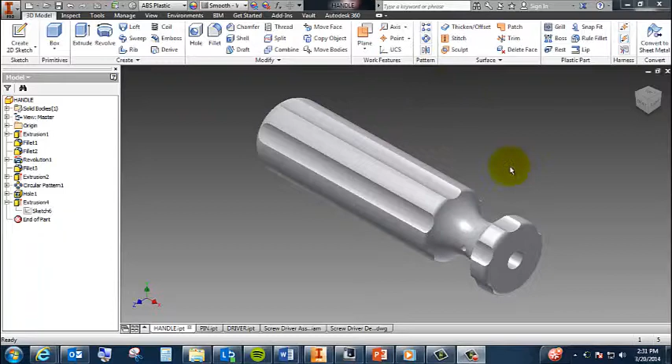This is where the project begins with the actual modeling of the different parts of the screwdriver. I first started with the handle, like you can see.

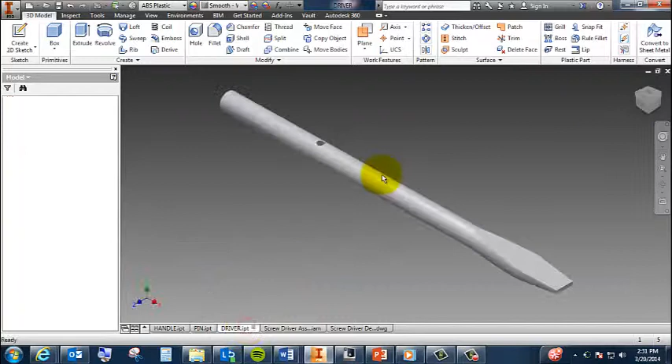You can change the material, you can do whatever you like to this model. Then I did the pin, which ends up holding the handle to the driver. And then the third and final part is the actual driver, and that would be this piece.

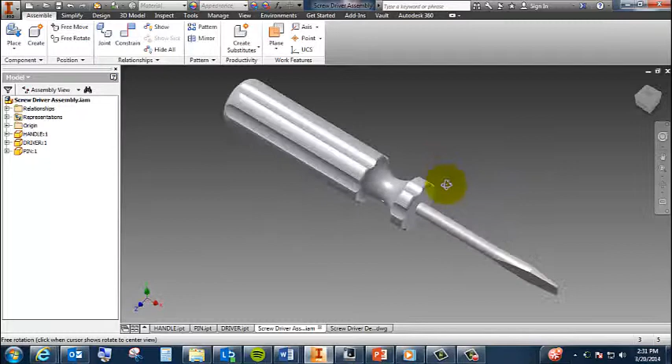This was all done by 3D modeling in Inventor. Then from there, you go ahead in the same program and assemble all three of your objects together. You'll notice the handle and the driver are together, as well as the pin holding it.

And then lastly, you go ahead and create your detail drawings of each part with the dimensions, as well as the assembled version, calling out the different parts with your different balloons, and a parts list with all the information from material, mass to volume, part number and name.

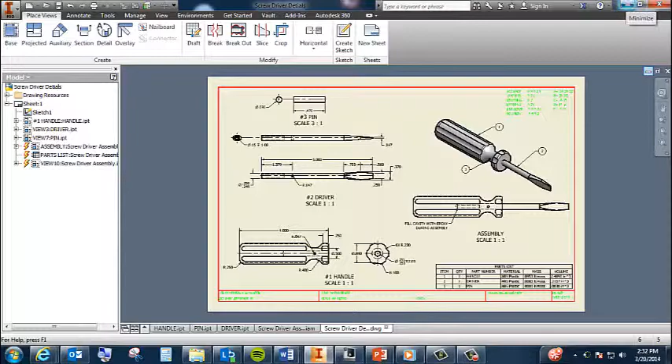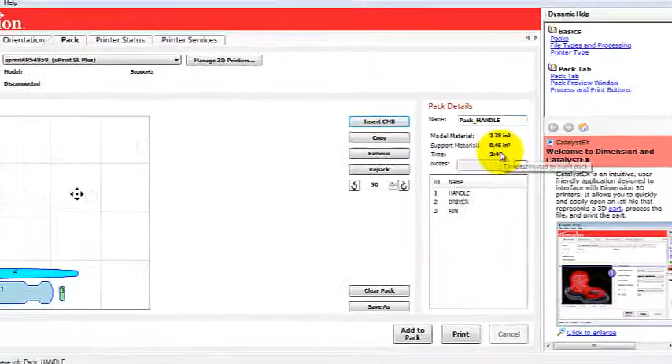It's actually very cool because it can tell you how much time it's going to take, how much material you're going to use as well. So it's a really cool program to go ahead and produce your drawings and actually have a model to hold in your hand.

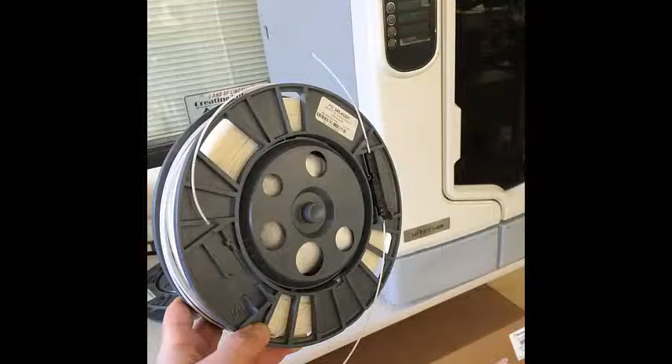The material for the 3D printer is ABS plastic, and it comes on a spool as you see here in the picture.

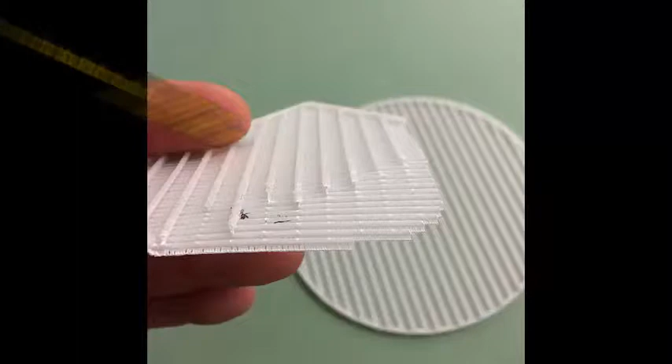These two spools then go into the bottom of the 3D printer. One is a support material and one is a modeling material. The 3D printer uses the support material as a base to build the model on. Here you'll see an example in the picture, and it's almost like a honeycomb material to hold that model in place as it's producing the object.

Here's the 3D printer in action, laying the support material for the screwdriver project. The printer starts from the bottom of the model and works its way up on the Z-axis. Once it is done creating the base out of the support material, it'll then work its way and start creating the model out of the model material.

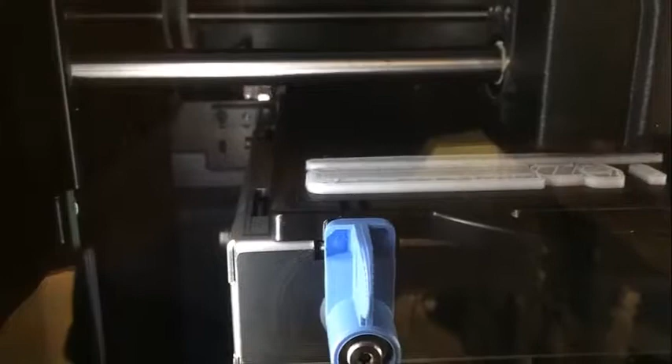We are going to fast forward in time, and you can see here that the base is done with the support material, and the 3D printer is now laying the actual model by layers, working its way up.

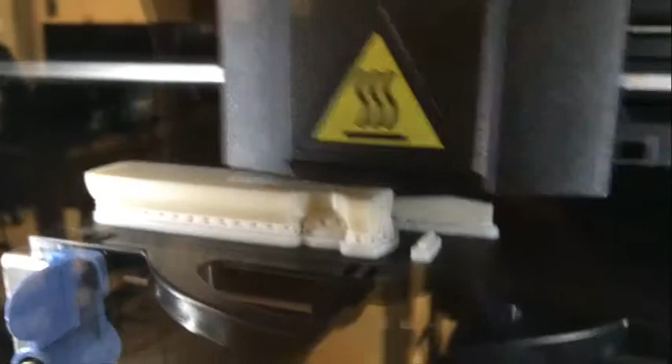We are going to fast forward again in time and see the progression of the model. Each layer is about the thickness of your hair, almost 10,000th of an inch, and the 3D printer pulls the spool of plastic in and melts it down at about 300 degrees, so that way it can build from the bottom up.

The 3D printer has completed the screwdriver project, and we're going to go ahead and take it out here. You can see the base of the support material and the models sitting on top of it as I pull the tray out.

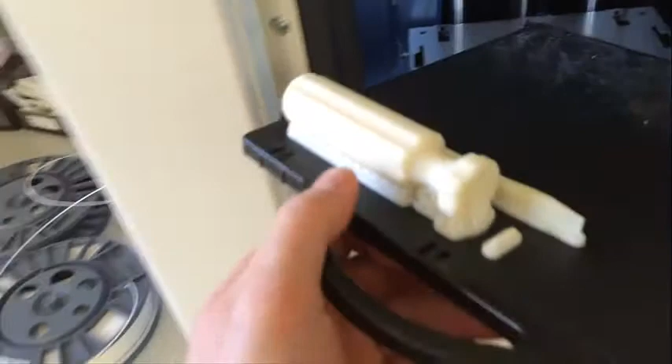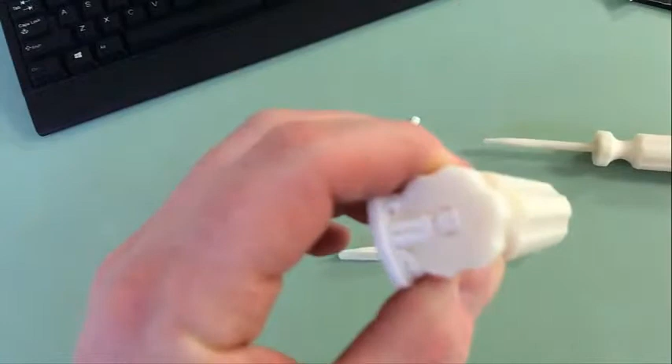Now that the parts are done, you'll notice that the support material is still attached to the model, so that is a problem, but there is a solution for it.

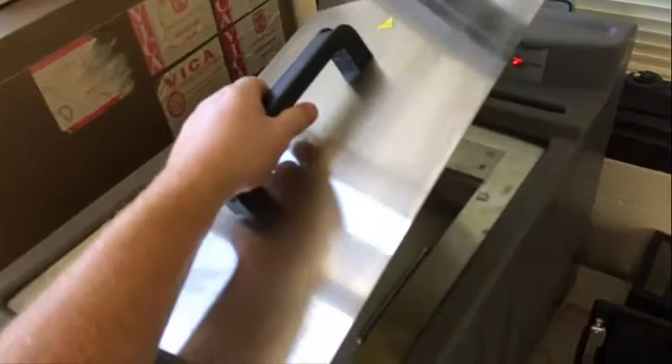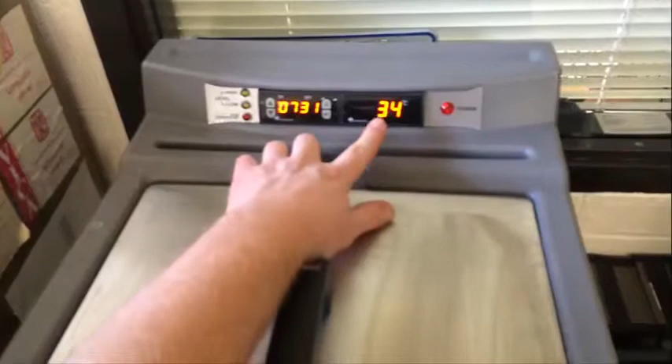To remove the support material, we will use this wash bath system that uses a detergent as well as an agitator to circulate the water, and we will turn it on. It will go up to 70 degrees, and we can set the time to disintegrate the support material and leave us with our final product.